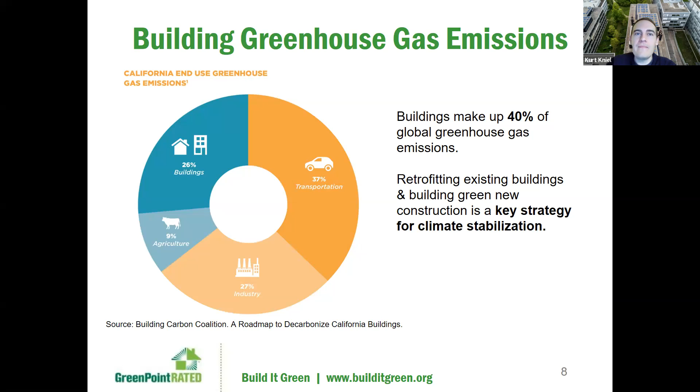Also, using water well, so putting in low water fixtures, like low flow shower heads, low flow bathroom faucets, even potentially putting in a gray water system to capture water that was used, but then reusing it for landscaping.

We look at indoor air quality. So we try to promote materials that contain low VOC. That can range from the type of insulation used in the home. It can also be part of the paint that's utilized, making sure that all of those materials are designed to really ensure that the air quality within the home is safe.

Resource conservation. Whenever construction takes place, a lot of materials end up being discarded. So we try to promote planning for how to best get rid of those materials, primarily through reuse or recycling them, and making sure that the building is built with durable materials so they last longer. You're not constantly having to replace the materials within the home.

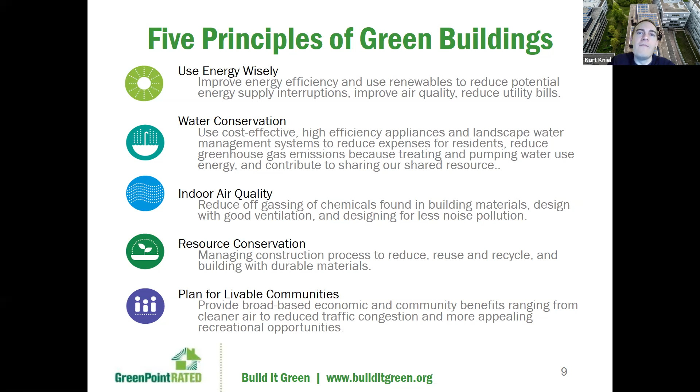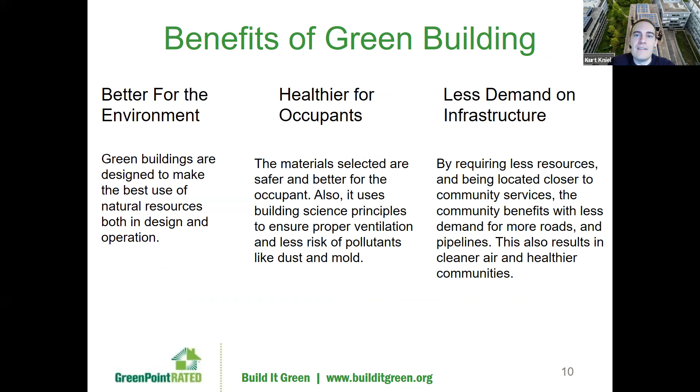So again, the main points we look at are better for the environment, healthier for the occupants, and having less demand on the full infrastructure.

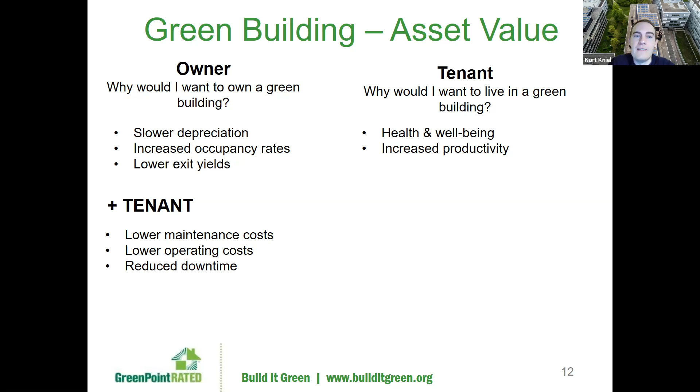Tenants may seek out green certified buildings just because they could be concerned about their health and they want to ensure that it was built to have low VOCs within the air of the home, which could lead to increased productivity. And then for a tenant, there's also lower maintenance costs, lower operating costs, and reduced downtime potentially.

So this kind of gets into CALGreen. CALGreen was the first mandatory green building code within the United States. It was developed around 2007 by the California Building Standards Commission. The biggest goal of it was to create a sustainable way to build effectively while also trying to meet the goal to reduce greenhouse gas emissions established by Assembly Bill 32.

It's updated every 3 years. So the last version is essentially the 2019 code, which was released and has been in effect since January 1st, 2020.

There are mandatory measures within CALGreen. Again, it's a building code, so it is mandatory. Some measures may not be applicable just based on the project type. There's some that are very oriented towards multifamily, while others would definitely be more towards single family.

And there's also tiers to CALGreen. Basic CALGreen is mandatory everywhere in California. And then Tier 1 and Tier 2 are a step above that mandatory measure, which some jurisdictions adopt and then require.

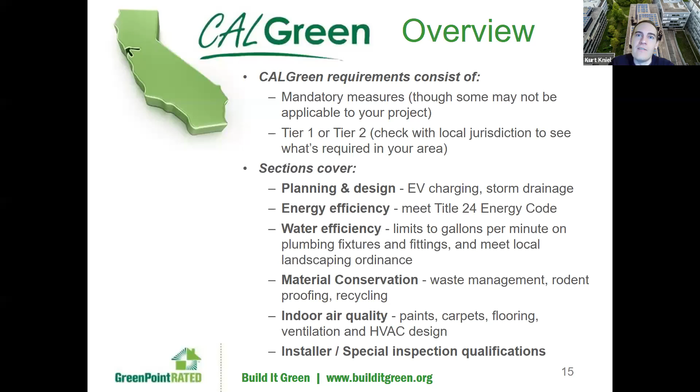So that kind of leads into what is GreenPoint Rated? So we're a certification standards and rating system for residential buildings. We focus just on residential. We do not do commercial.

The most comparable certification to us would be LEED certification. And as such, we are a consumer label tied to that third-party verification. We have a checklist of best green practices.

Some measures in our checklist are required, but the majority of them are an optional pick and choose, if you would, where you find the best practices that would be applicable to your project, and then you would obtain points for achieving those.

We have local governments that do utilize GreenPoint Rated as a local ordinance just because it's easy to plug and play. We build upon CALGreen. So it's a way for local jurisdictions to ensure that not only CALGreen is being met, but that their goals for greenhouse gas emissions are being obtained for the residential sector.

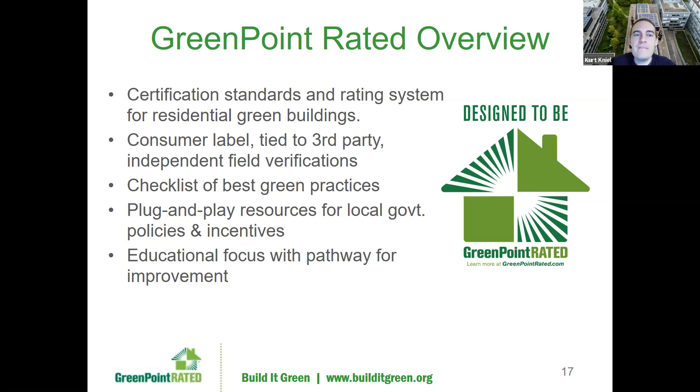So again, it's complementary to LEED for homes. We have different sections of points that one can obtain in different categories. It was based in California and grown in this area. One of the things I want to point out is we were developed before CALGreen.

So kind of getting into that plug and play: we developed GreenPoint Rated before CALGreen. Once CALGreen was developed, we aligned a lot of our measures with it, but went slightly beyond what CALGreen required. So meeting GreenPoint Rated is an easy way to ensure CALGreen is being met. It's one of our prerequisites, and we build upon some of the measures.

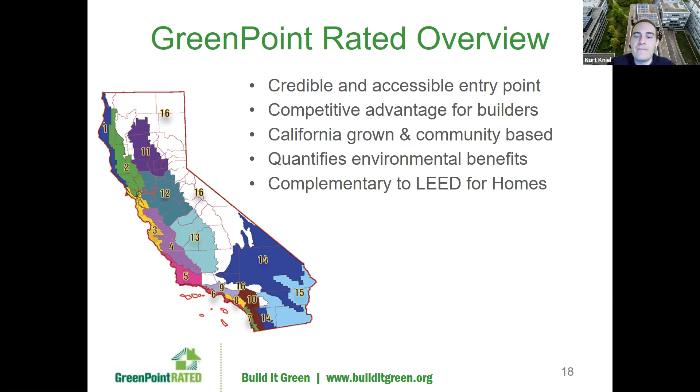A big objective of what we do is to educate builders and building managers about the benefits of green construction, and to ensure that there is an overall standard of guidelines that can be met to ensure the performance is being met for the project.

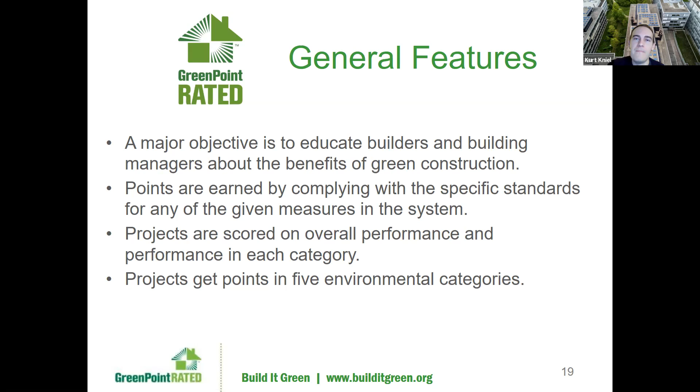Projects get points in 5 categories: resource conservation, energy, water, IAQ, and community. We want to ensure those areas of the green building are being met to a minimum specification. So again: energy, water conservation, indoor air quality, resource conservation, and community. We require a minimum amount of points be met in each of these categories to obtain certification, just to ensure the green building is being looked at holistically and not just in one category.

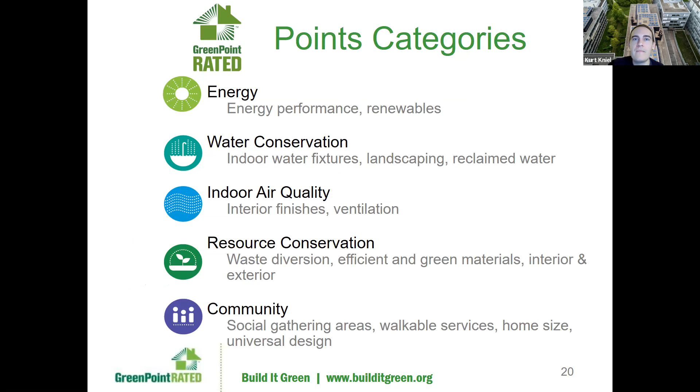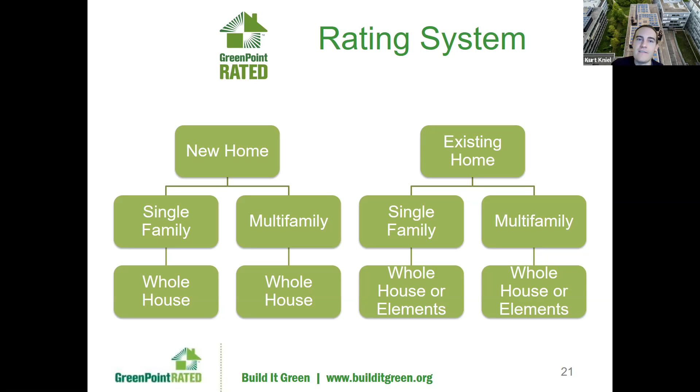The GreenPoint Rated system is provided for both new home and existing home projects, and within each we look at both single family and multifamily. With new construction, we have a GreenPoint Rater brought on before the design process. This integrated design can help minimize costs and maximize benefits, and ensures there's a third party verifying the construction phase to ensure it's being built correctly.

With the existing home system, buildings of any vintage can get rated. One interesting aspect about existing buildings is that a home can be certified without any additional work being done, as long as it meets our standards. So if an existing home from, say, 1970 was built extremely well, we could potentially recognize that without them having to do a major rehab.

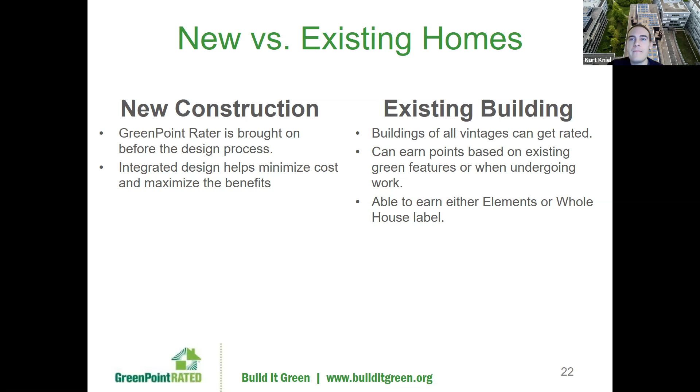This breaks out the different point categories. So again, we have categories like community, energy, indoor air quality, and so on. But within each of those categories, we have a minimum set of points that need to be met. By doing different measures, as we call them—like if you were to put in a high performing shower head, you could obtain some water conservation points—and then we would need a minimum of 6 if that was a new home project to obtain that requirement.

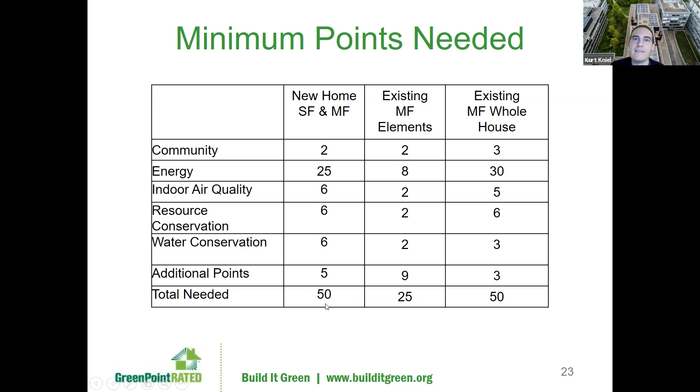You would do that for each category, but then obtain a minimum of 50 total to obtain the certification. We have different levels: points range from a minimum of 50 for new home all the way up to 300. Within each of those point categories, there are levels ranging from certified at the very bottom all the way up to platinum if a project accumulated a lot of points, 140 to 300.

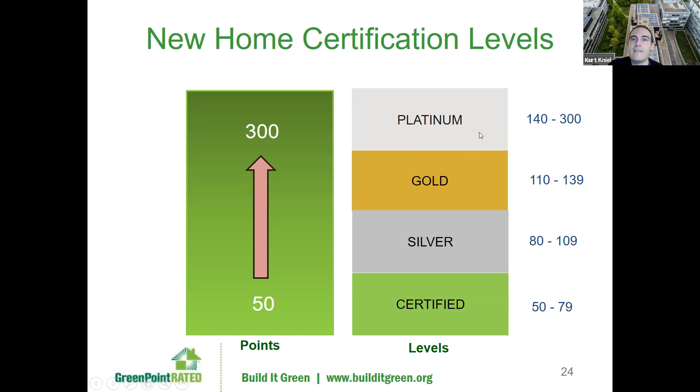So I'm going to go into a little bit of a comparison between CALGreen and GreenPoint Rated. CALGreen is a minimum requirement to be met to go through our program, just because CALGreen is code. And then I'll show you how we look at what CALGreen requires and then go a bit beyond that.

Yep, we got a question: what are some other existing home levels of accomplishment between elements? That's a great question. So elements is kind of our basic certification for existing home.

We really see elements as a prescriptive, easy approach to recognize some of the smaller home improvements that can be done in an existing home. The elements label ranges from 25 points to 49. The more robust certification for existing home is whole house, which ranges from 50 points on, and that's really oriented towards major rehabilitations or doing some major work within the existing home.

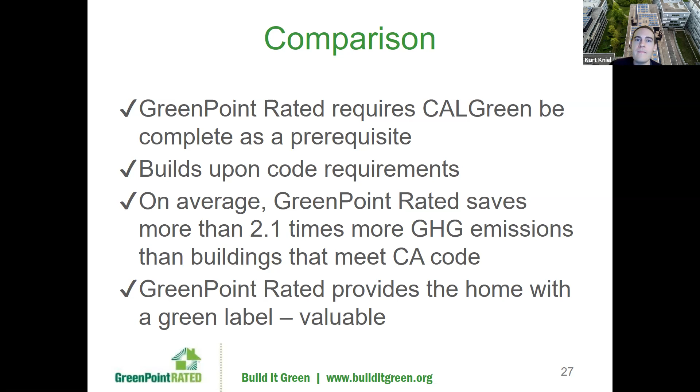As an example, there's a construction waste disposal requirement. If construction is taking place, there's a minimum amount of waste diversion that has to be done. CALGreen currently requires a minimum of 65% of waste be diverted from landfill, recycled or reused. We go a step above and require a minimum of 70% waste be diverted.

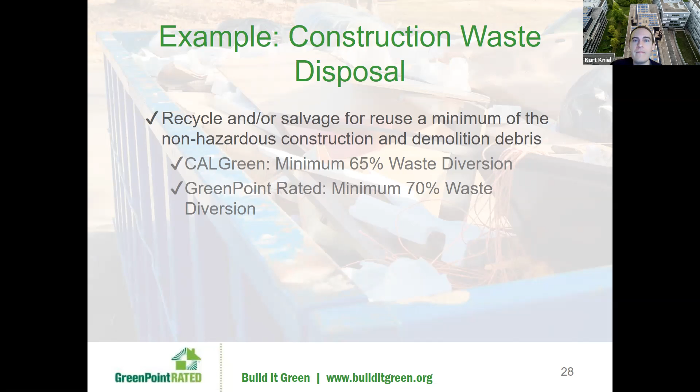Here's an example with water fixtures, in the case of toilets. CalGreen requires that toilets have a maximum of 1.28 gallons per flush or less. That's code, that's required. We try to take that a step above, requiring a maximum of 1.28 gallons per flush, but we also want to see that they have a maximum allowed performance, or MAP score, of at least 500 grams. That's an additional test of the toilet to ensure it can flush correctly, so it's not going to require multiple flushes. It'll work with just one flush and not waste additional water.

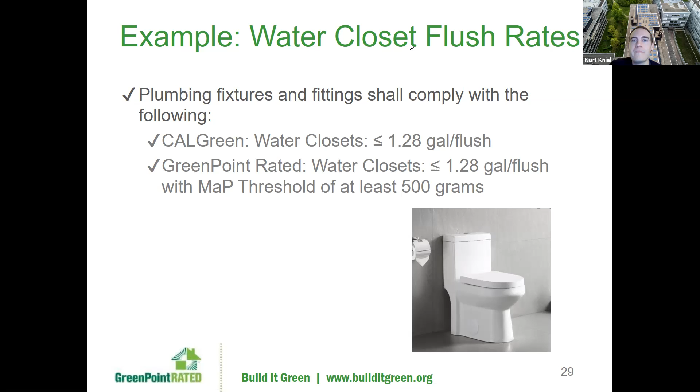From an IAQ, or health, standpoint, CalGreen requires VOC limits for paints and coatings within the home, ranging from 50 grams per liter to 150 based on the paint type. We really try to promote lower VOC limits, and we try to cap them at 5 grams per liter.

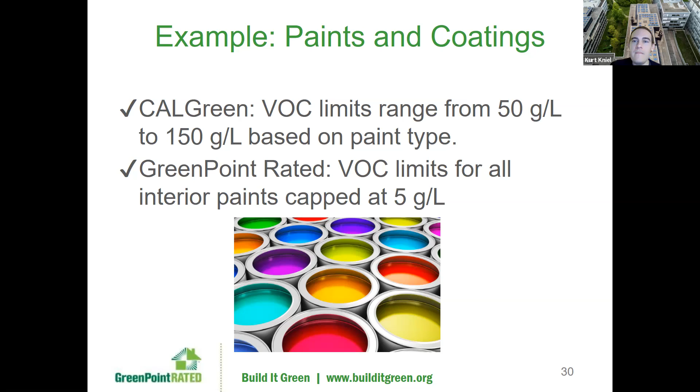We got a quick question. Does Title 24 include CalGreen requirements other than those related to energy efficiency?

Yes, CalGreen requires many other things than just energy efficiency. They require water use conservation. There are sections around limits on VOCs for different types of things used in the home, ranging from paint to insulation. The best place to find where the code is referenced is the actual building code itself. I don't remember the exact web address, but if you search for CalGreen code, there's a database within California that you can refer to.

So we can go over a home that was GreenPoint rated. This one is multifamily, but a lot of the measures within our system could also be applicable to single family. This project was Villas on the Park in downtown San Jose. They obtained a gold certification, and it was composed of 83 supportive homes or units dedicated to formerly chronically homeless individuals.

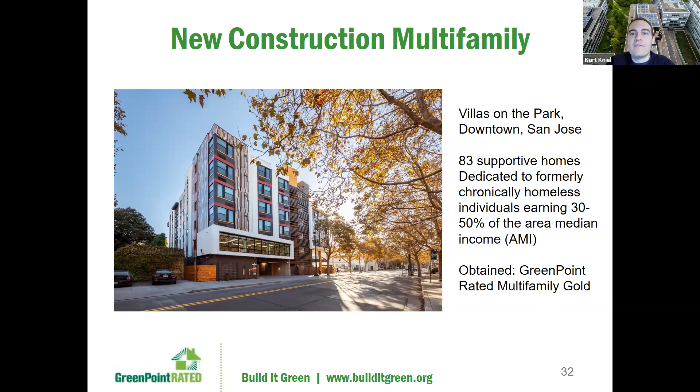Some of the required measures for GreenPoint Rated are: they have to meet CalGreen, the basic building code. We want them to meet ASHRAE standard 62.2, which is essentially a minimum set of required ventilation standards to ensure fresh air is getting into the home. If there's any shingle roofing, we require a minimum warranty on it for new construction, obviously.

We want the GreenPoint Rated checklist to be in the blueprints so the builder and anyone else working on the project can easily refer to those measures and ensure they're incorporated into the design. We also have the third-party verifier fill out a green appraisal addendum. This is used if the home is ever sold and needs to be appraised, helping incorporate those features into the appraisal.

In terms of the energy efficiency measures of this specific project, it outperformed Title 24, Part 6 by at least 10%. That's the energy code requirement. They incorporated a solar hot water heater system as well as PV installation, trying to offset their energy use, not just plug load and end-use electricity, but also the energy required to heat the water system.

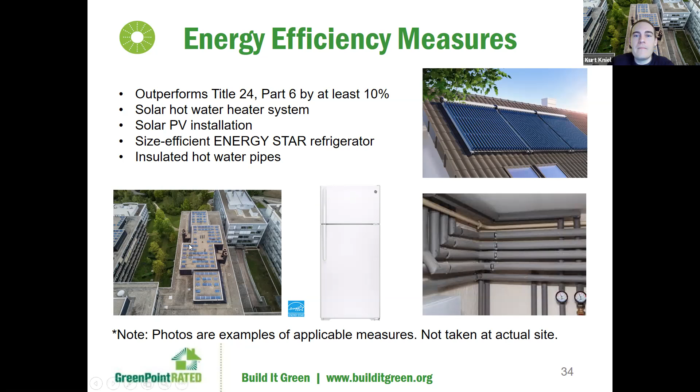In terms of water conservation measures, they incorporated 3 inches of mulch in the planting beds. This helps retain moisture and requires less frequent watering, really minimizing the amount of turf in the landscape. Grass consumes a lot of energy, not just in watering but maintaining it with fuel to mow, so minimizing that within the landscape.

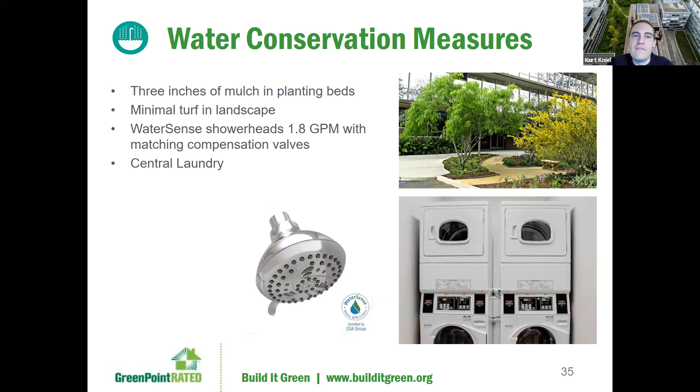They had WaterSense shower heads with 1.8 gallons per minute in the project, with a matching compensation valve ensuring water use is minimal. And then central laundry—this is more applicable to multifamily projects—having the ability for tenants to share a central laundry instead of having laundry within each unit.

With indoor air quality measures, they installed insulation that met the CDPH standard method for low emissions, ensuring that any VOC emissions are either non-existent or extremely minimal. Also ensuring that the insulation does not contain fire retardants, again lowering VOC amounts.

With the bathroom fans that were installed, seeing that they were Energy Star to consume a minimum amount of energy, but then also checking that their airflow rates were correct and that they were able to exchange enough air to vent properly.

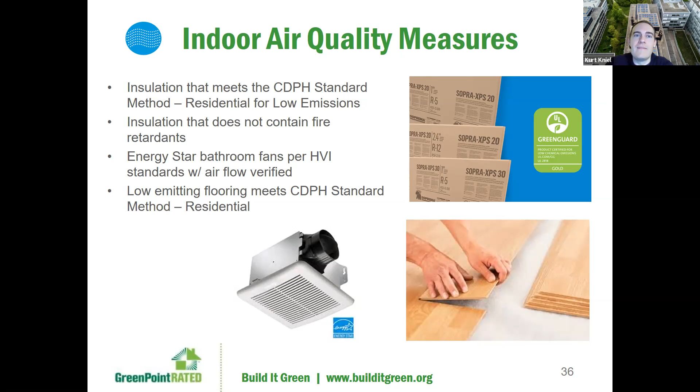And then for any flooring that was utilized, ensuring that it also met a VOC emission standard so that it was minimal again, and the air quality was as best as it could be.

For the resource conservation, they did a 65% waste diversion. That was code.

Landscaping, making sure that no invasive species were installed. We like to see native species, plants that are correct for the climate, being planted.

Making sure that the structural pest and rot controls are built as best as possible. One way you can do that is to locate all of the wood at least 12 inches above the soil, so the potential for it to be damaged or to rot is minimized.

Installing insulation with recycled content, so not only identifying insulation that has low VOCs, but also has recycled content within it.

We promote projects that utilize infill sites instead of building upon virgin land, and also ensure that the homes are built efficiently.

We're not seeing homes that are built extremely large, way larger than they need to be. Larger homes in general will consume more energy and water, and that helps conserve resources overall.

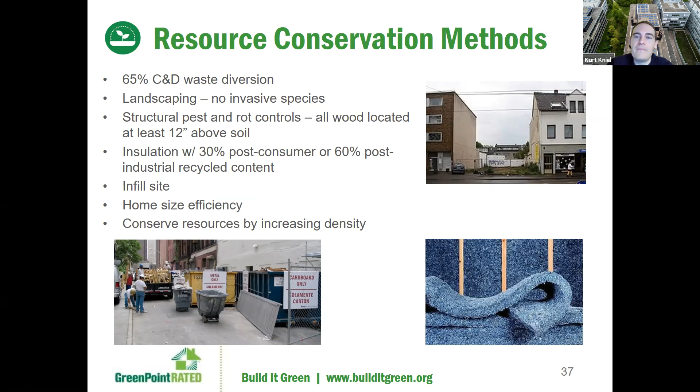Some of the community measures that can be met and that were utilized by this project was locating it close to a major transit stop. We count a major transit stop as either a light rail system or a bus stop that is frequently utilized and visited.

Having pedestrian access to services, so if a project is located in an area where someone could easily walk around to meet their usual daily needs and not have to depend on a car, we recognize that and give points for that.

Recognizing bicycle storage for residents, as well as reduced parking capacity, again really trying to promote walking or using public transportation instead of being so car dependent.

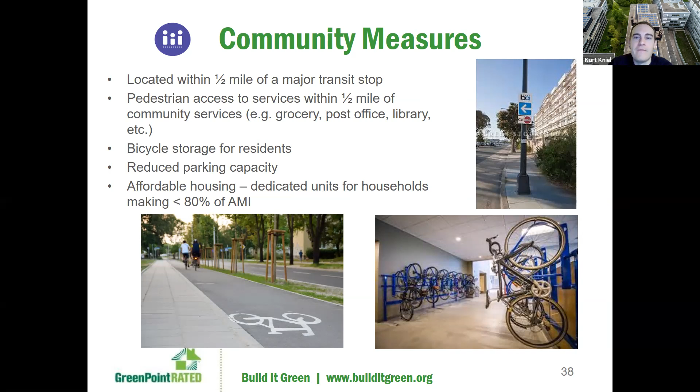And then also, if it was affordable housing, such as in this case, we will provide some recognition for that and provide points.

These are some common upgrades we see on the existing family side. In the building envelope, weather stripping, windows and insulation are the most common, just kind of smaller upgrades.

When we see some of the larger upgrades, that can take into account HVAC and control integrations, having a hot water system upgraded to something much more efficient, and then lighting and controls, putting in LEDs or dimmers.

Appliances, most appliances are going to be much more efficient than they were, say, 20 years ago, so just getting a new one by itself will help. But if one were to get one that was actually Energy Star certified, ensuring that it's operating the best it can and uses the least energy.

And then just fixture replacements, so putting in low flow devices such as toilets or shower heads, and then doing landscaping and irrigation changes.

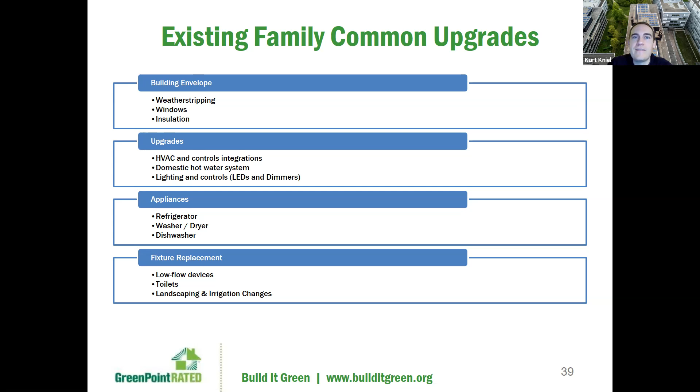So we train raters to go out and actually do the verifications. All of them have to have some background in green building and at least some sort of building professional license or certification. Essentially, we want to ensure that they have a background in the construction and building industry.

For existing home, we do require that they have some type of building performance experience, just because a lot of the existing home requirements do look at testing how the home is functioning and ensuring that either it's working and is as efficient as we're looking for, or helping to identify those upgrades that need to take place.

And that's the same on multifamily, but for multifamily raters, we do require that those for existing home have some sort of multifamily building experience.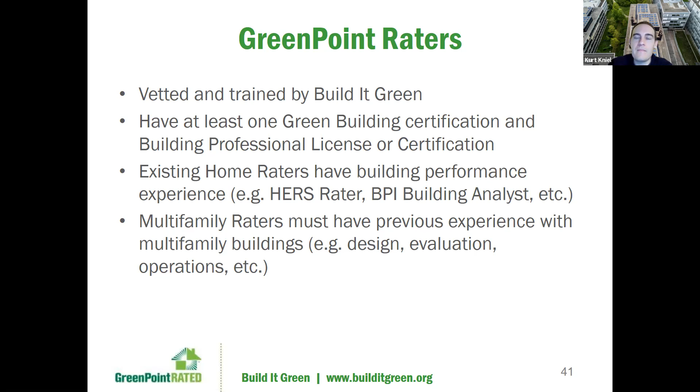If an individual wants to go through GreenPoint Rated, they would hire a third-party rater. The rater would fill out the GreenPoint Rated checklist with them and identify which measures they want to obtain.

Once the project is undergoing construction, or if it's complete, they would go out and obtain that documentation. It can either be photos, or for some of the measures we require spec sheets, but just obtaining that documentation to ensure that it was actually done. They would then submit that to us, where we would review it. And if we agree that the verification was done correctly and the measures were performed as the intent was, we then issue them the certification packet.

We have certified GreenPoint raters in our professional directory. This is on our website, just under the directories and resources. And then one can filter the type of raters they're looking for, as well as any other certifications the individual has.

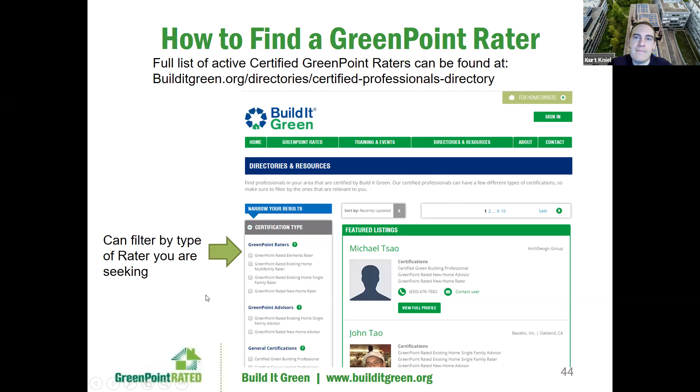We also have a Green Home Calculator. It does kind of a basic assessment of a home and tells you how well it's functioning and the types of upgrades that can be done. It's pretty easy to fill out. It's at greenpointrated.com/calculator. And you just put in your zip code, the square footage, when it was built, as well as information around how many bedrooms and bathrooms it has.

With existing home upgrades, one can obtain rebates from, for example, utility programs. This is just an example of some of the rebates that are available right now. Through Southern California Edison, they're strongly promoting heat pumps, both for water heaters and HVAC. And then PG&E is also providing some rebates for heat pumps as well as Energy Star smart thermostats.

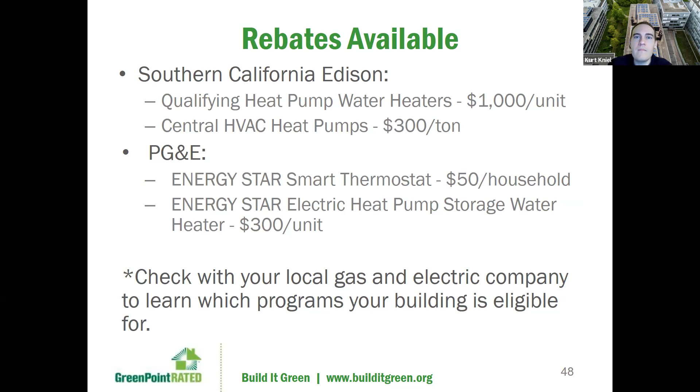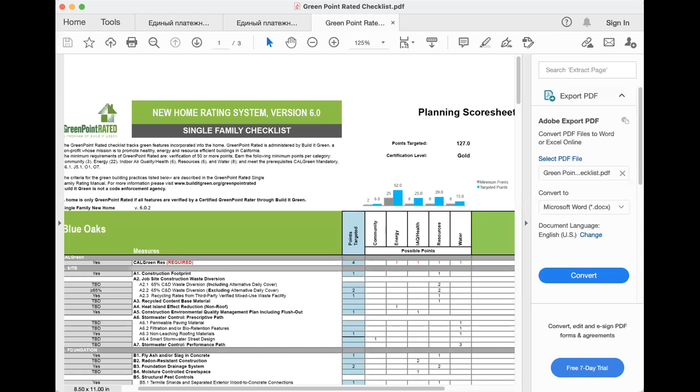There was actually an earlier question about the plug and play system. If you will allow me to share the screen, I'll show the checklist and maybe you can comment on how people can select which points they can target. Yeah, that's one of my earlier projects. So you might have already a more recent version, but I think it kind of shows where you can go, like the minimum by community measure and the maximum by community measure and the possible points, right?

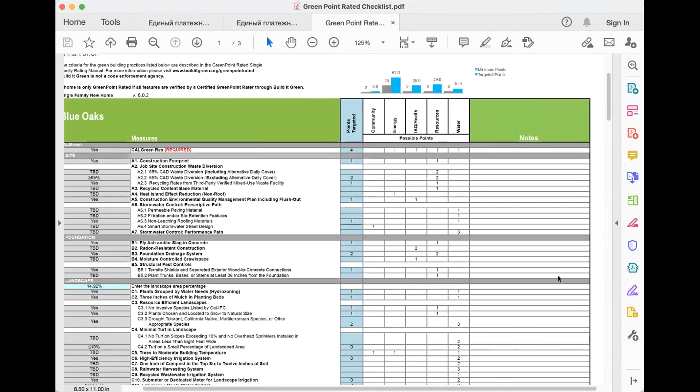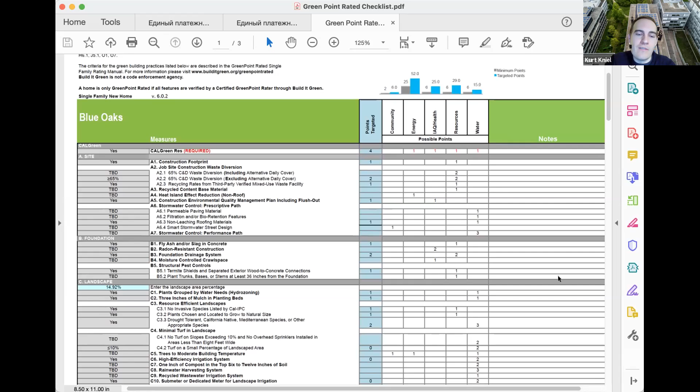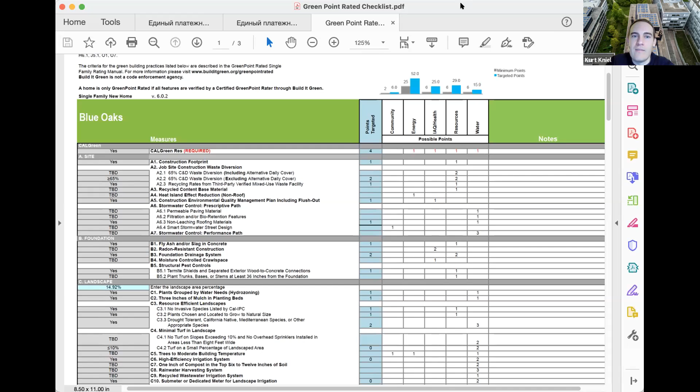Yeah, so this is an example of one of our checklists. You can see that we have quite a few measures that can potentially be obtained. The first one there is just the CALGreen requirement, and it's required, it has to be done, it's code. But then all of the other ones that do not have 'required' in there are optional measures that you would go through and try to select if applicable to your project. You can see the number of points in the right-hand column that the measure provides. There are a few different columns based on the category. So under section A, site, those can range from the community, if that's the smart stormwater street design, all the way to 3 points under water for the storm water control performance path. And we require a minimum amount of points be obtained in each of those categories to obtain the certification, as well as just an overall requirement of 50 for new home.

Yeah, I think I will not scroll down because it is really 3 pages of questions which you could target with a yes, no, or try to.

We got a question about green buildings have lower construction costs. Yeah, a lot of that has to do with, it's much more applicable to production builders. If they are able to really design green building into their planning process, they can see lower construction costs primarily due to resource conservation. We really strive to have them plan to diminish the waste that they generate. So for example, if a builder is able to really incorporate prefabricated panels and off-site construction within the factory and have it shipped over, that really reduces a lot of the waste and can lead to lower construction costs.

There is also a question if the categories within the GreenPoint checklist include methods to satisfy the measure. We don't have it within just the checklist, but we do have an accompanying manual that goes much deeper into each of those measures. It talks about the intent of the measure, describes some of the requirements to obtain it, as well as examples of what would qualify a project. So we have that available, not within the same document, but as the main reference manual.